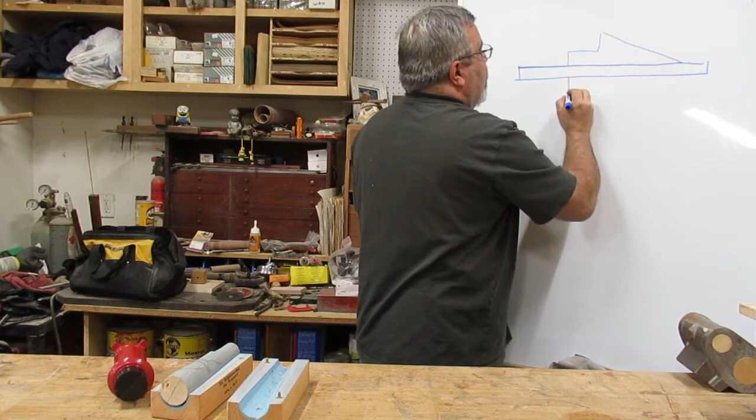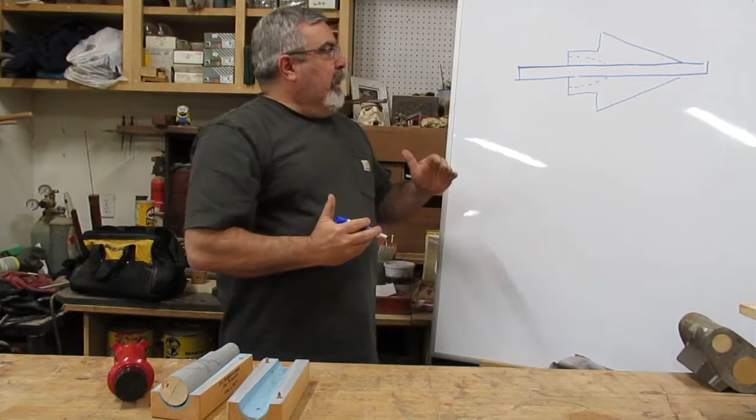So the way I'd go about this project: say you've got your pattern board, your spearhead shape, and then your other half. He's got to put a hole in there that's kind of conical shaped for them to put a shaft on it. So he was asking the best way to make that conical shape, like on a split.

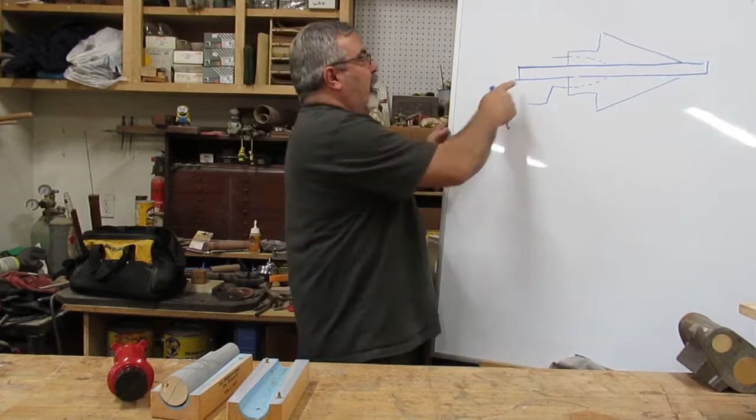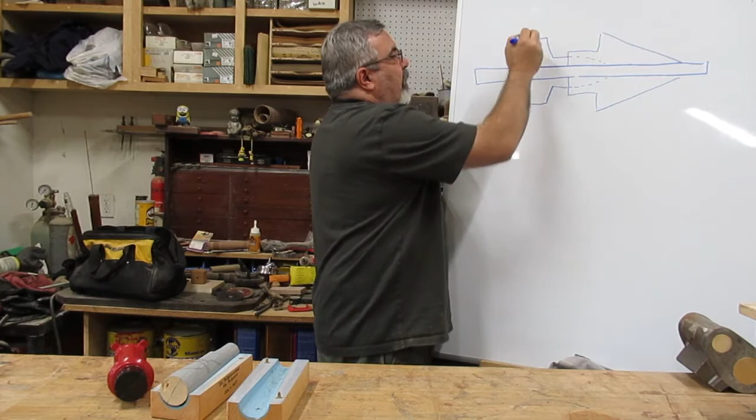To me, I wouldn't make a split box with this one. What I'd do is have a core box that comes with a core print. I'd have the core print come out here, and on your drag half, actually with this it's smaller, you could do it on a cope and drag. Let's make this a little longer. What you've got to do, I think I explained this once before, is put what's called a key on the end of a core, since it's going to be a blind core.

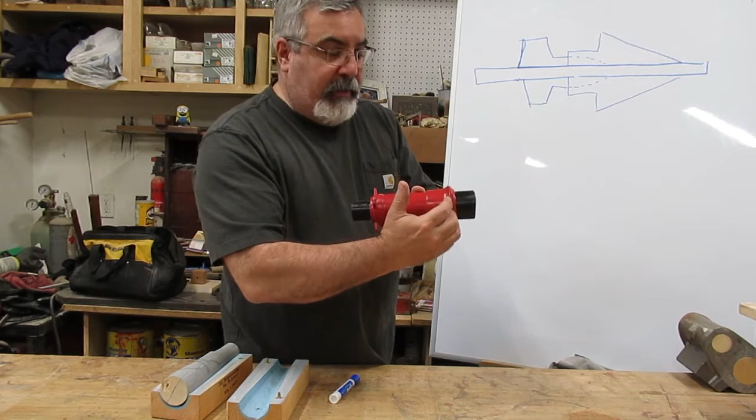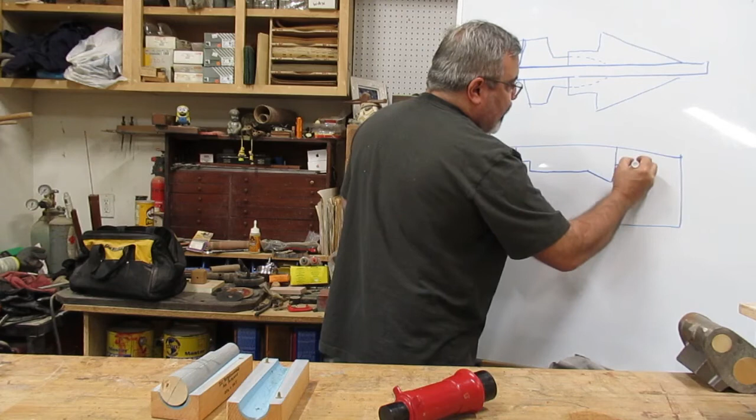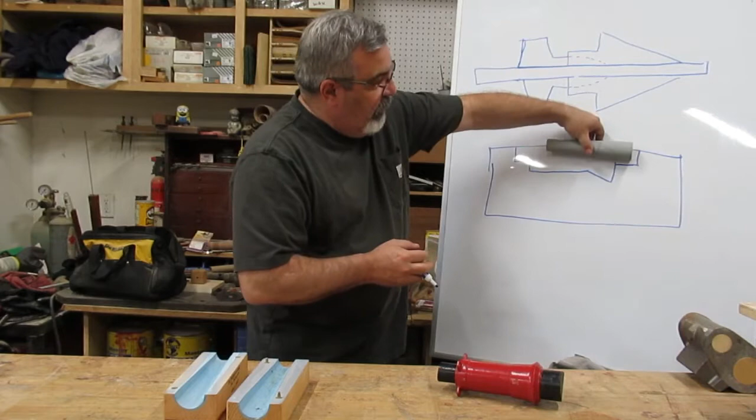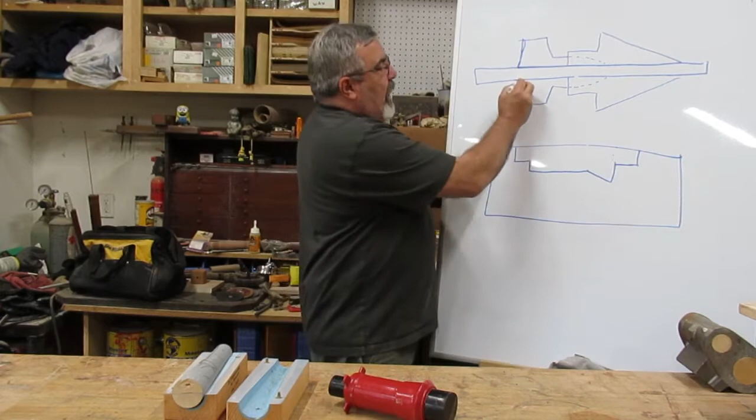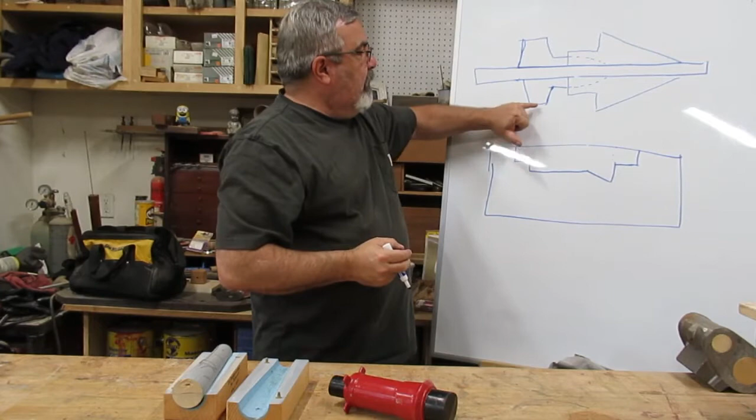So with this one, you have something for the core to hang on both ends, so it's not an issue - once you mold it and set the core, you're good. You're not coming all the way up to the end of the pattern, so this core right here has got to be hanging up in your mold. I would make a key. It's small enough where he could probably just make one side, but for simplicity, this is the way I would make it.

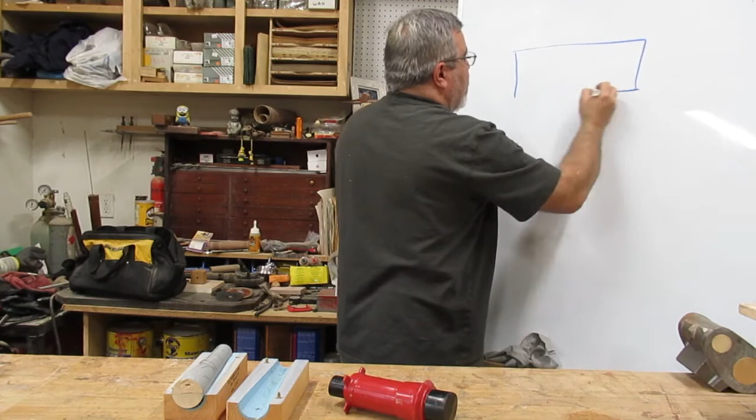I would just make a dump box. The way I'd make that is - let me do a side view real quick first - you have your core box, you would have your core print like that, and then there's your core.

I don't know what his capabilities are, I don't know if he's got the plastic - like I said, you get that from Freeman. If I remember, I'll remind Joe to put a link on Freeman Manufacturing. They sell to anybody, they mail out. I do believe they sell it in quarts, but I'm not 100% sure.

But the other thing you could do - I'm trying not to make this a MacGyver site where it's like you take bubble gum and band-aids to do it. I want to try to get you guys to do the right things. There are instances where I will kind of do the MacGyver thing though.

So this is what Tobo might want to do - I don't know his capabilities here. What he could do is make a core stick, and it would look something like this, with a little point on it. And a top view, it would look like this. So there's a couple ways you can go about doing that.

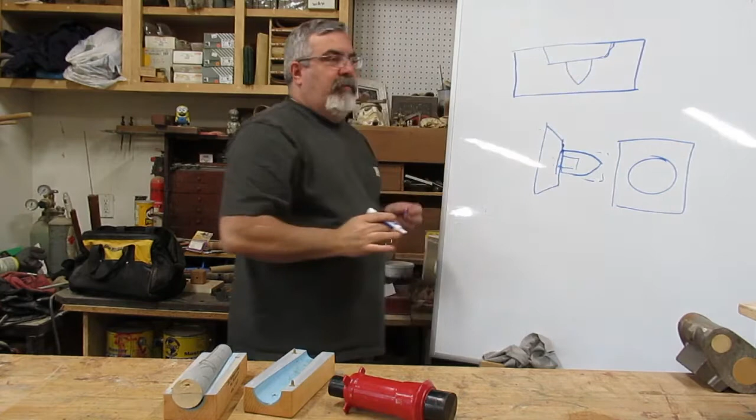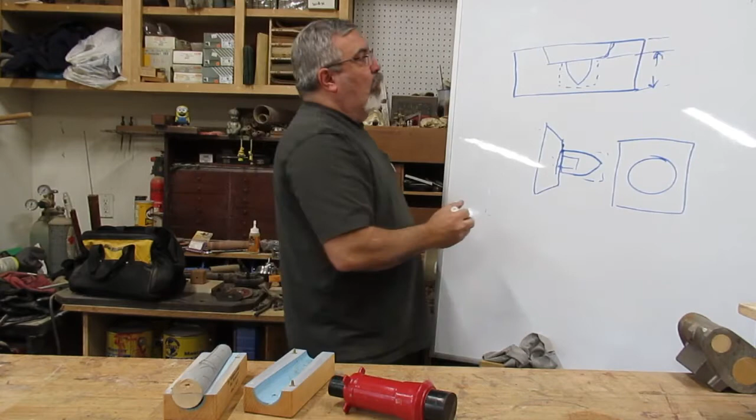To make the core box, you could take another block of wood, whatever dimension this is, drill a bit of a hole in here, and then get this piece, however deep your core print is. You cut a hole here, close, like a square hole, right?

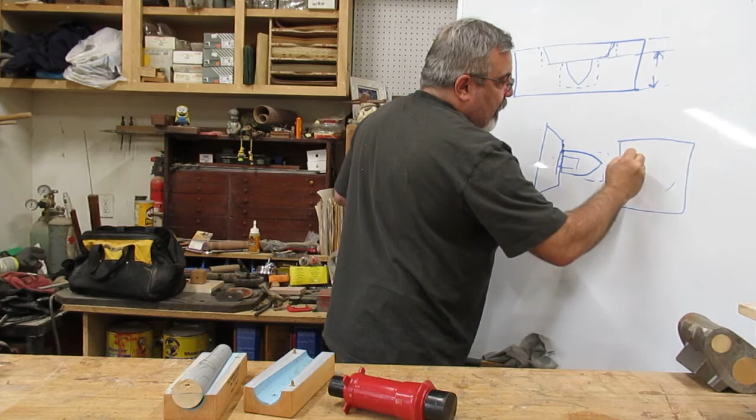You'd have your square hole there, and then your round one. What you could do, really close, is make your core stick, put a couple pieces of wood across it so it rests on top of your core box.

So then what you could do is mix up a bunch of Bondo, fill this full of Bondo and just squish that down. That'd be the least expensive way to do it, okay?

That Bondo will last you, I mean you probably make a hundred cores in that. I wouldn't do that for a customer, but if it was something I had to do, I always have enough repro around, though there have been times I've taken Bondo and made what they call a splash out of it.

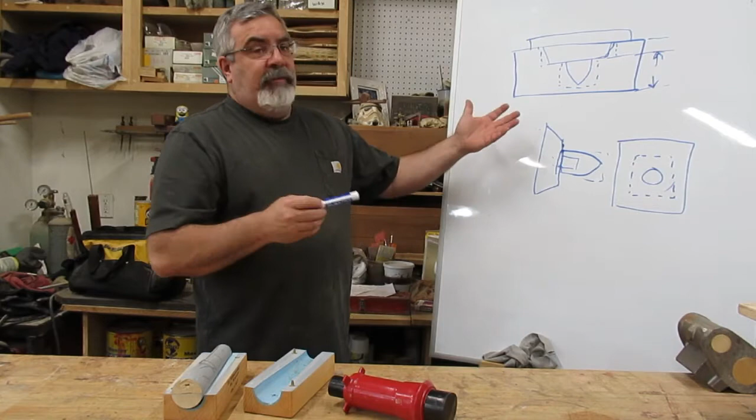So you could do it that way, or if you want to make it a little more permanent, nicer, go to Freeman, get some Repro. They've got other plastics. I've just always used Repro 83. They have other plastics, I don't know if there's any that's less expensive.

Look around, there might be other plastics on different websites, urethane plastics you could use. I just don't know of any.

So there is a company called Hapco. We used to use those. I actually did use Hapco at one time, more for some work I used to do for a company that did styrofoam. I used to sell a special glue to glue styrofoam together, and some kind of wax product you wipe all over the styrofoam pattern to fill all the holes. Hapco's got a lot of different plastics too, we just don't use them.

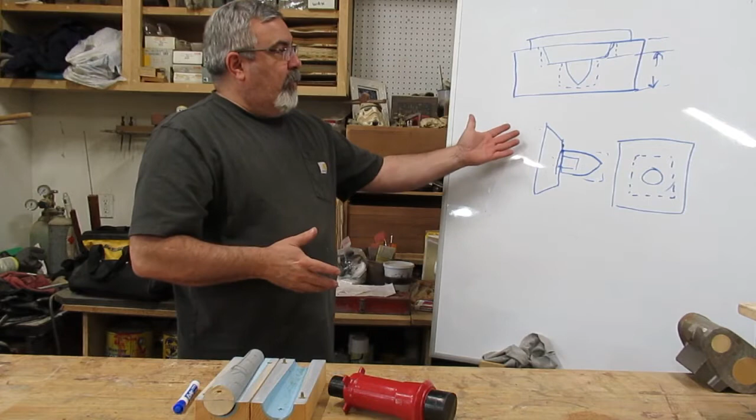But Tobo, I know, hope I'm not killing your name here. That's a couple different ways you could do it. I literally would just make a dump box. I wouldn't do a split box or anything. That'll get you going with that.

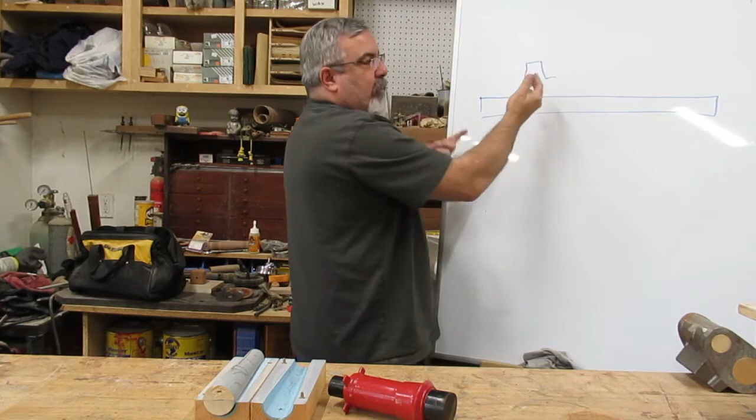And then, like I said, you just set it up on your pattern board. Here's your pattern board, like I said. And then you'd have your core print there, and that's basically what we call a key, the technical term for it. And then here's the end of your spear tip.

Looking down at your pattern board, you'd have one fin that way, and your other one this way. Let's make a board thickness here. So you'd have your spear tip or arrow tips or whatever, and then your core print would be there. That's the way I'd go about doing this project if I was doing it.

And like I said, for you to make a core stick, you could do it on a drill press if you have a drill press.

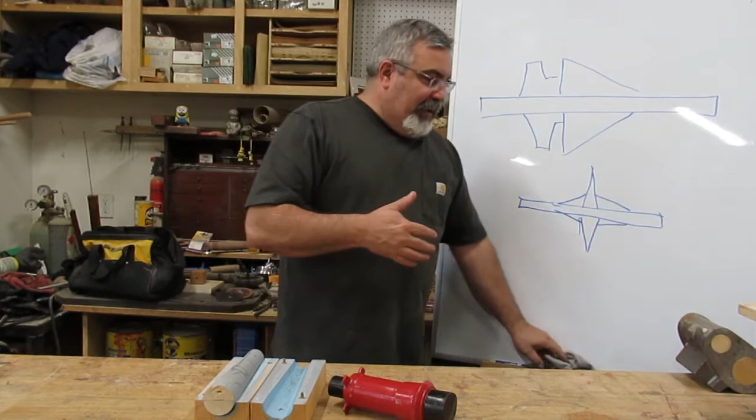You know, you could do it with a hand drill. Like I said, I'm trying to get it where I want to get you guys where you're like the ultimate craftsman.

I realize not everybody has a shop like this. I gave you guys a tour of my shop. My dad, most of these machines were his, so that's one thing I've lucked out on during my life. I bought a couple myself, but it's hard to get a shop like this going. And don't forget, this isn't a hobby shop, this is a business here too, even though it's in my garage.

And then I got lucky with hand tools. A lot of his buddies that were pattern makers gave me a lot of their tools. And I had a couple of his buddies actually make me things like those split centers for working on the lathe.

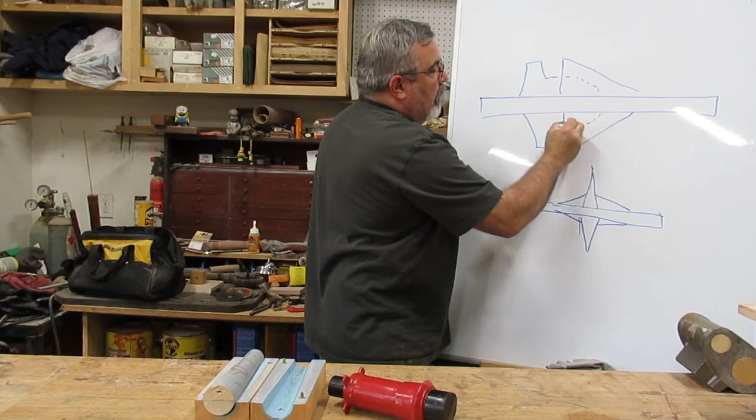So like I said, if you guys got a project and you're a little stumped on it, just write me a little note and I'll try to get together with you and figure things out, get things going. And like I said, this would be a hole in here too, right? So that's the way I would do it. Just a thing too is you're gonna have to have some, if you do a dump box.

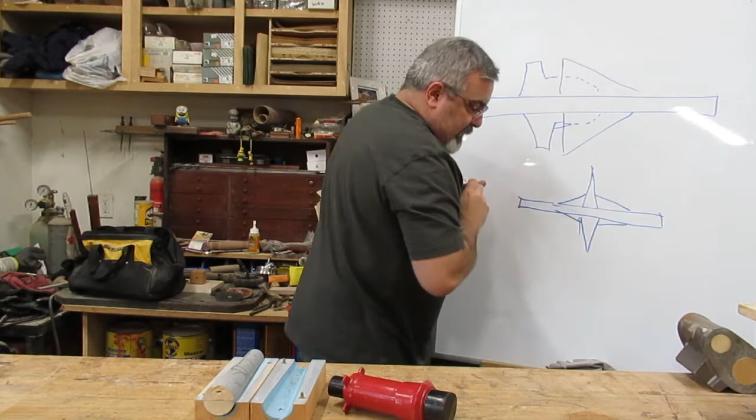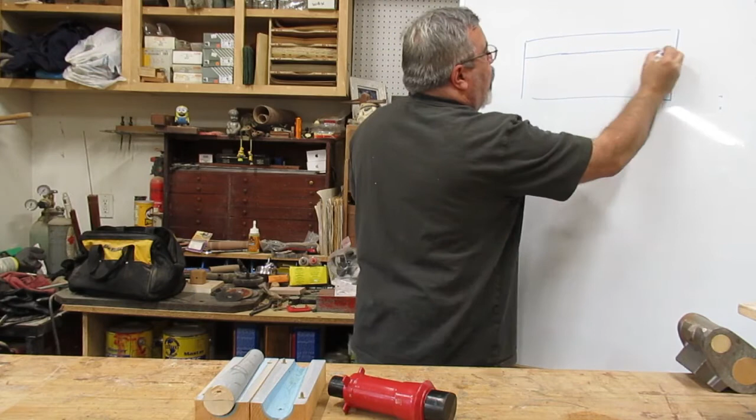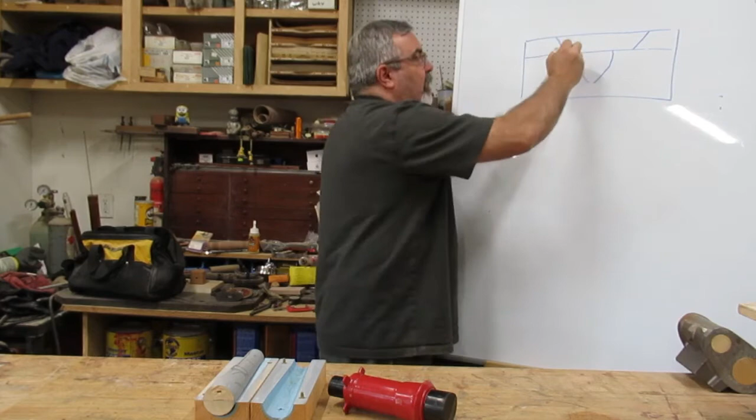So with this dump box, okay, here's your box. Like I said, I would go however thick the core print is, right? So you're gonna have draft that way. When you make the hole for your shaft, you're gonna have to have a little bit of draft that way too. I don't know how deep it's gonna go, so you gotta make sure that's gonna pull out of there, okay.

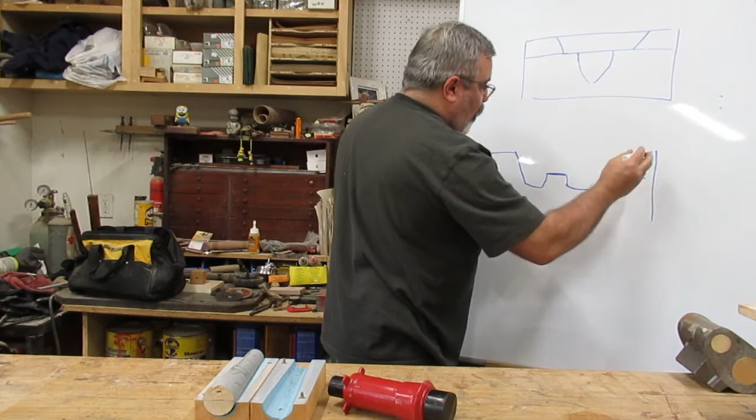And then once you're setting this, okay, so here's your mold, there's the hole for your core print, you're coming back up a little bit, there's the shaft hole, and then this will be the shaft, right? So what's gonna happen is, when you set your core in there, this surface here is gonna be here.

So that's gonna be straight, but don't worry about it. Just make sure that this dimension right here on the top of your core print of your pattern is the same dimension as that, and it'll lock in there, okay.

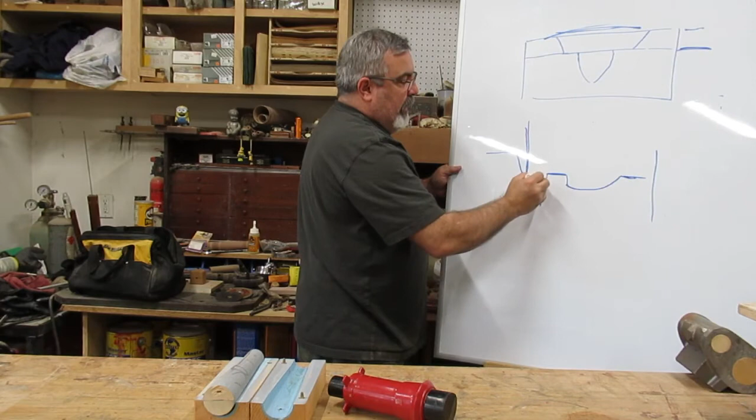And then you'll have a little gap here which metal will probably get into, but I mean, if you want to get fancy I wouldn't do it, but you could bevel that. It's not necessary, just let the metal in and cut it off later. That's the way I would do it, so that's the way you could do it.

I don't know if I'd really do it any other way. I really don't. So I think that's the way I'd go with this.